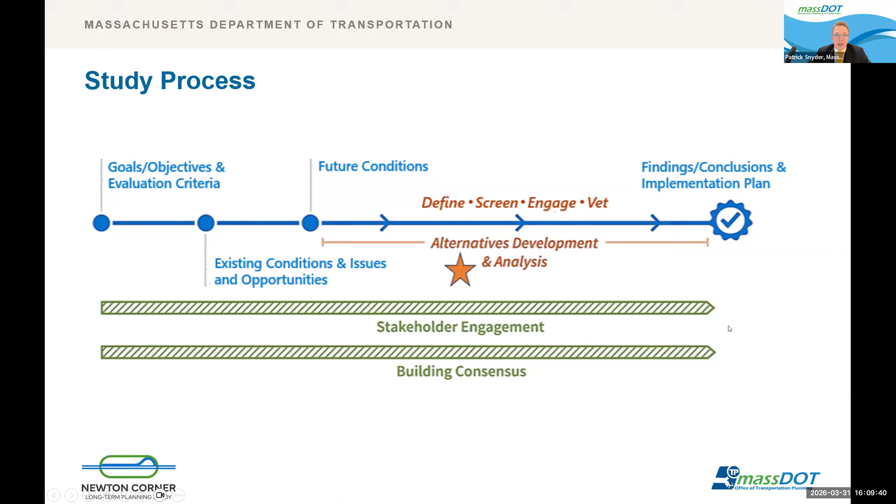At this point, we're going to transition to an overview of our alternatives development process, and I'm passing it to Christine from our consultant team, VHB.

Thank you, Patrick. Hi, everyone. It's nice to see a lot of familiar and friendly faces. I know it's been a while. I'm Christine Trearchis. As Patrick noted, I'm the project manager from VHB for this study. Now, let's take a look at the alternative development process.

You may recall that we came to you last year with some initial ideas that we referred to as alternative components. These components were an initial list of ideas based on previous feedback that we'd received that could then be layered upon each other to develop full concepts. These included the following components on the screen.

So I'll read through them very briefly. Number 1, 2-directional travel within Newton Corner. 2, installing roundabouts. 3, a new bridge connecting Centre Street North to Centre Street South. A relocated I-90 westbound on-ramp. 5A and B are a relocated I-90 eastbound off-ramp and extending the existing I-90 eastbound off-ramp. 6 is closing or repurposing the Washington Street westbound bridge. 7 was a bus transit hub in Newton Corner. 8 was a potential commuter rail station in Newton Corner.

9 was air rights or decking over I-90. Then closing or repurposing the Washington Street eastbound bridge. A pedestrian or bicycle bridge over I-90. A neighborhood greenway on Charlesbank Road. A shared use path on St. James Street. A pedestrian and bicycle bridge connecting directly to the Charles River. Full interstate access at West Newton, and finally new interstate access in Brighton.

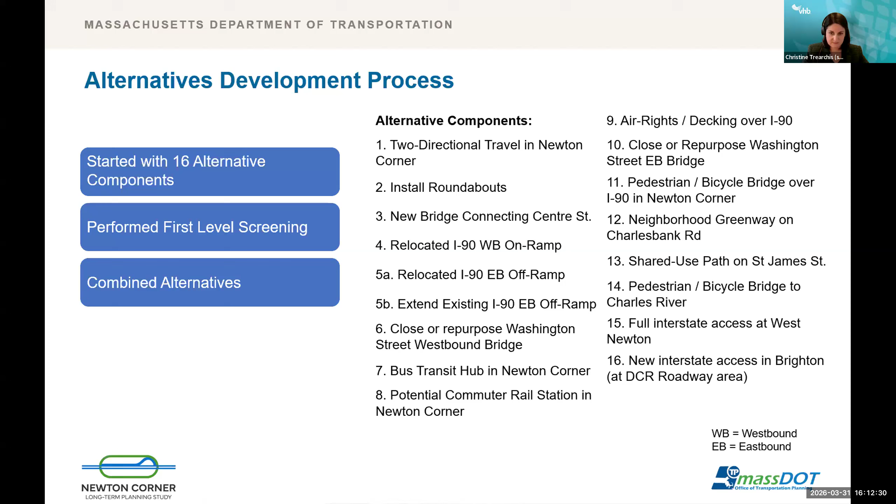Now we're going to review the 6 draft alternative concepts with you to get your feedback before we carry them into the analysis phase.

Before presenting each draft alternative, I want to set the stage that these are concept level alternatives and are preliminary. They are intended to illustrate intent rather than provide a detailed design. Further refinements will continue through alternatives analysis and in coordination with all of you in our working group, the City of Newton, MassDOT, and ongoing public engagement.

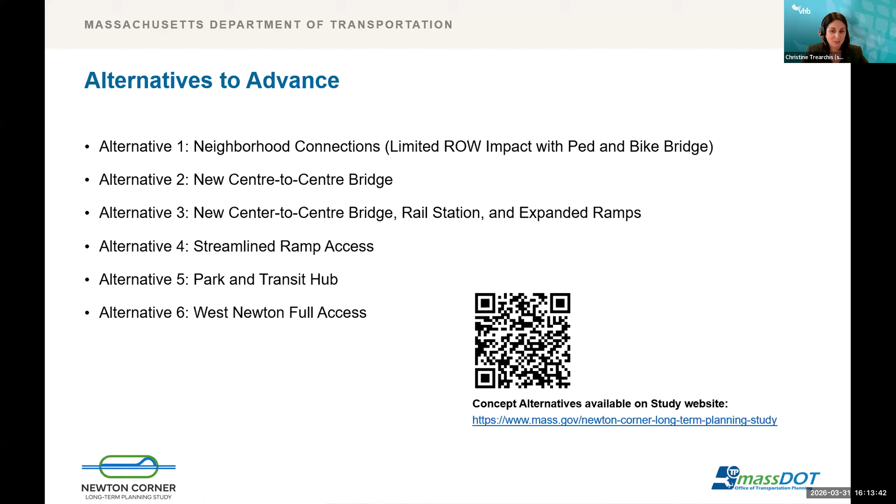Alternative 1, neighborhood connections. This first combined alternative is focused on enhancing neighborhood connections for all users, including the addition of a pedestrian and bicycle bridge across I-90 with limited right-of-way impacts. This alternative will also maintain the existing vehicular bridges on the east and west side of the interchange.

As you follow along, I'm going to highlight a few key features of this alternative. The first is maintaining one-way travel on the western bridge, so it would be in the southbound direction. Next is extending the second lane on I-90 eastbound on the I-90 eastbound off-ramp by about 400 feet.

Then, as I noted, a new pedestrian and bicycle bridge across I-90. Then extending the second lane on the I-90 westbound off-ramp by about 500 feet. I'll note that this is one element that you will see in all of the concepts presented today.

This includes two-way vehicular travel on Washington Street north of I-90, as well as on that east bridge. It includes neighborhood pedestrian and bicycle connections on both Charlesbank Road and St. James Street, connecting to the Charles River via Russell Road.

And finally, a one-way northbound travel on St. James Street to accommodate a shared use path for both pedestrian and bicycle movements.

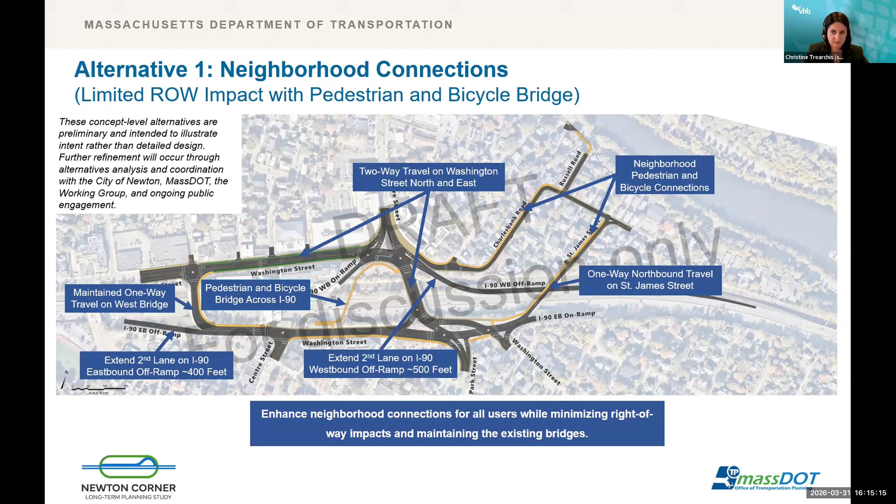Now I'm going to review the vehicular circulation patterns. As shown, this alternative will provide two-way vehicular traffic on Washington Street north of I-90, as well as on the Eastern Bridge. One-way travel will be maintained on Washington Street south of I-90, as well as on the Western Bridge. The intent of this revised circulation pattern is to reduce some driver confusion by providing new and more direct travel paths. Additionally, St. James Street will be converted to one-way travel northbound to accommodate the new shared use path.

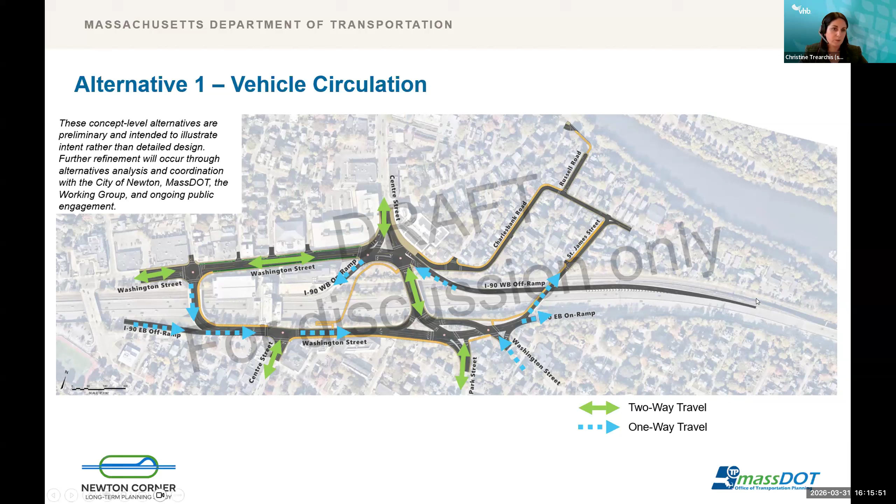With the proposed changes in vehicle circulation, we wanted to show a few key travel path movements. The two that I'm going to walk through are routes that would change from the current operations. For vehicles traveling on Washington Street from the west to I-90 westbound, drivers will now be able to stay on the north side of I-90 and won't need to circulate around the south side of Newton Corner to access the ramp.

Another route that will be more direct is for vehicles traveling from Centre Street north of I-90 from Watertown to Park Street south of I-90. Drivers will now be able to travel southbound on the existing East Bridge, eliminating the need to travel all the way around Newton Corner.

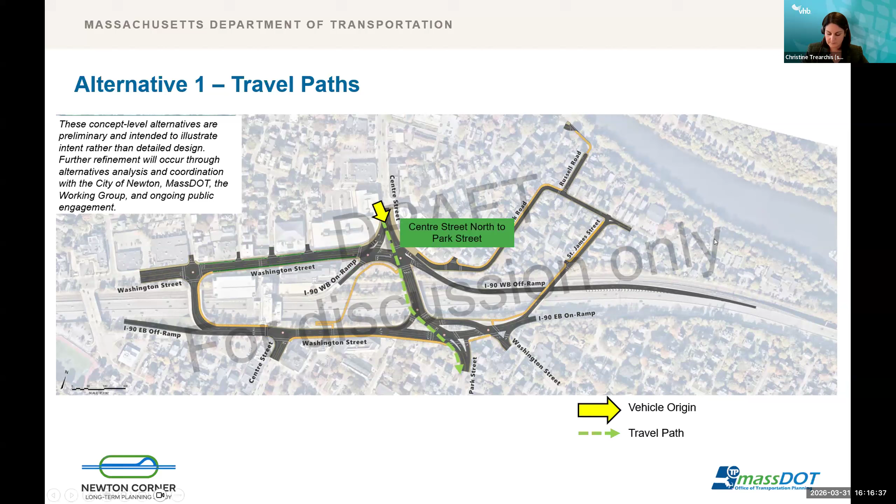Bicycle accommodations will consist of a mix of shared use paths and dedicated bicycle lanes provided on nearly all roadways and through the Newton Corner interchange. A new bicycle and pedestrian bridge is proposed for north-south travel, connecting on either side of I-90. Additionally, new shared use paths are proposed on St. James Street and on Charlesbank Road, connecting to the Charles River via a new connection off of Russell Road.

Sidewalks will be provided along all roadways without shared use paths, and signalized crosswalks will be located in all quadrants of Newton Corner. I will now hand it over to Matt to walk through the second draft alternative.

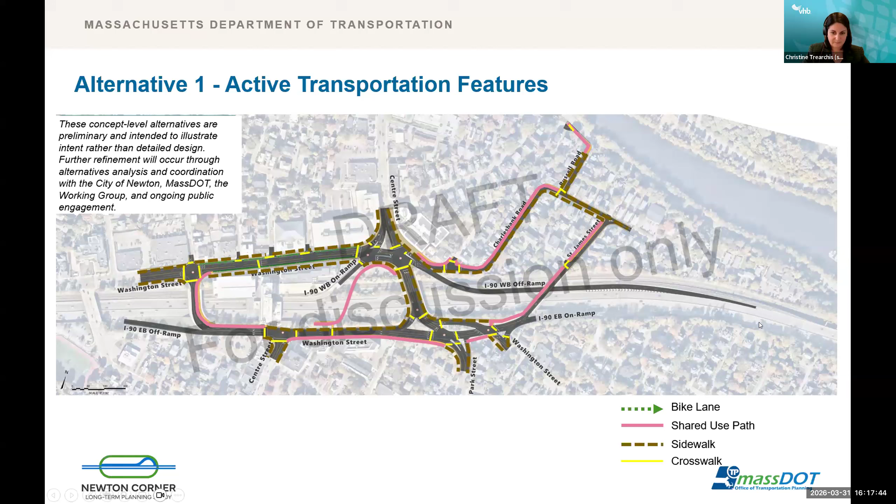The second draft combined alternative will improve north-south connectivity with a new Centre-to-Centre bridge, while also maintaining the existing east-west bridges at Newton Corner and the existing Church Street Bridge. The new center-to-center bridge will connect Centre Street on the north and Centre Street on the south, reestablishing the historic street network through Newton Corner, and it will provide two-way traffic for vehicles, pedestrians, and bicyclists, greatly improving connectivity across Newton Corner.

Now I'm going to talk through a few of the key features in this alternative, similar to how we did in alternative one.

The first element I'm going to talk about is a relocated I-90 westbound on-ramp. For this alternative, we're proposing to relocate that on-ramp from where it's currently located, roughly in the northeast quadrant, to the west of Church Street, west of Newton Corner.

Next element is pedestrian and bicycle accommodation. Pedestrians and bicycles will be accommodated on the existing West Bridge with a new shared use path. Additionally, the West Bridge will accommodate northbound or westbound vehicular traffic. Similar to alternative one, the second lane on the I-90 eastbound off-ramp will be extended by about 400 feet, while that off-ramp will remain in the existing location.

As I mentioned earlier, a key element of this alternative is that new center-to-center bridge, accommodating bidirectional travel for all users and reestablishing the historic street network.

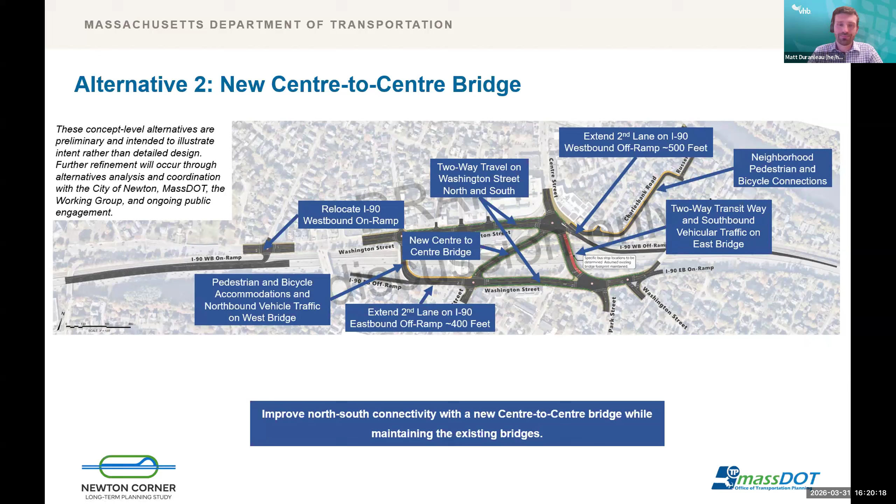Looking at some vehicular circulation patterns, two-way traffic will be provided on Washington Street north and south of I-90 and on the new center-to-center bridge. Additionally, the two existing east and west bridges in Newton Corner will flip direction, with the west bridge carrying westbound

or northbound traffic and the east bridge carrying eastbound or southbound traffic. This will better align the direction of each bridge with the desired travel paths and will work in coordination with the new center-to-center bridge carrying bidirectional traffic.

Looking at some key travel paths for movements that will change: first, the travel path from Park Street from the south for vehicles heading to I-90 westbound at that relocated on-ramp. If you're coming up Park Street, you would now take a left onto Washington Street on the south side of I-90, on the new two-way section. You would then continue across I-90 on the existing West Bridge, where traffic would be reversed, now one way in the westbound, northbound direction. Then you would take a left onto Washington Street, past Church Street, and then take a left onto the new westbound on-ramp located west of Newton Corner.

For drivers traveling from Center Street on the north side, from Watertown, to Center Street south towards Newton Center, you would be able to go straight through on this new bridge through the two new signalized intersections, and you would not need to circulate around Newton Corner as you do today.

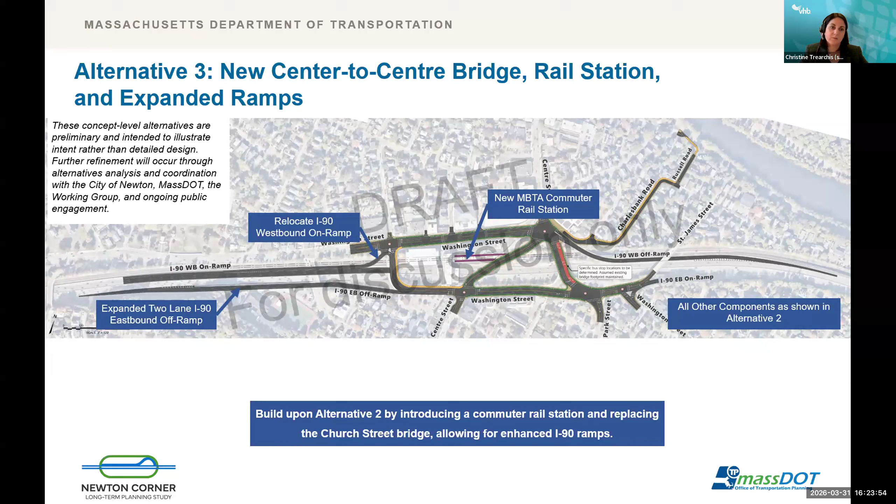Let's look at a couple of travel paths for the movements that will change with this Alternative 3. The first path is from the I-90 eastbound off-ramp. If you're headed towards Center Street to the north, towards Watertown, as shown, you will now get off the ramp, take a left turn onto the new center-to-center bridge that will then allow you to travel northbound.

For vehicles traveling from Center Street North, from Watertown to the I-90 westbound on-ramp, drivers will now take a right onto Washington Street and then make a left turn at the relocated on-ramp that ties in at the intersection with the existing West Bridge.

The active transportation features are the same as what was previously presented in Alternative 2.

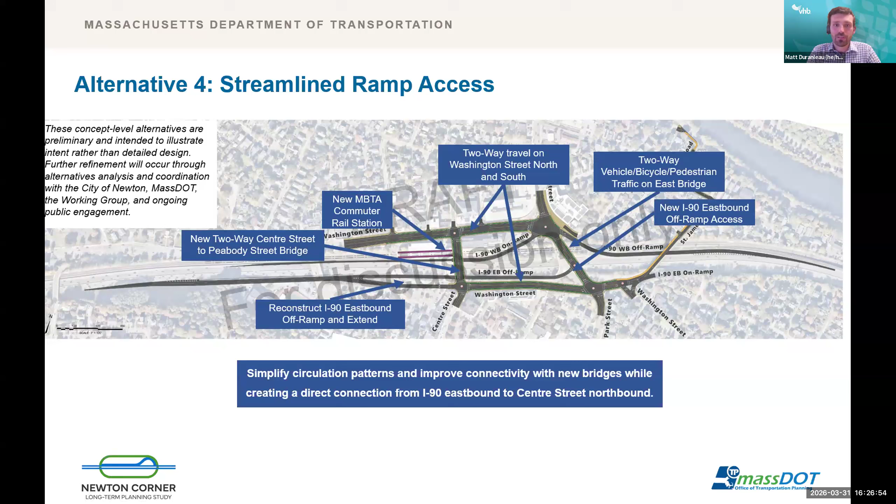The East Bridge would be reconstructed and would include two-way accommodations for vehicles, pedestrians, and bicyclists on the East Bridge. There'd be a new direct connection from I-90 eastbound that would connect to this East Bridge, allowing a more direct connection for vehicles destined to the north on Centre Street towards Galen Street in Watertown, which I'll highlight again in a minute on the travel path slide.

Again, we'll extend that second lane on I-90 westbound to provide additional capacity. And we will include neighborhood pedestrian and bicycle connections connecting to the Charles River.

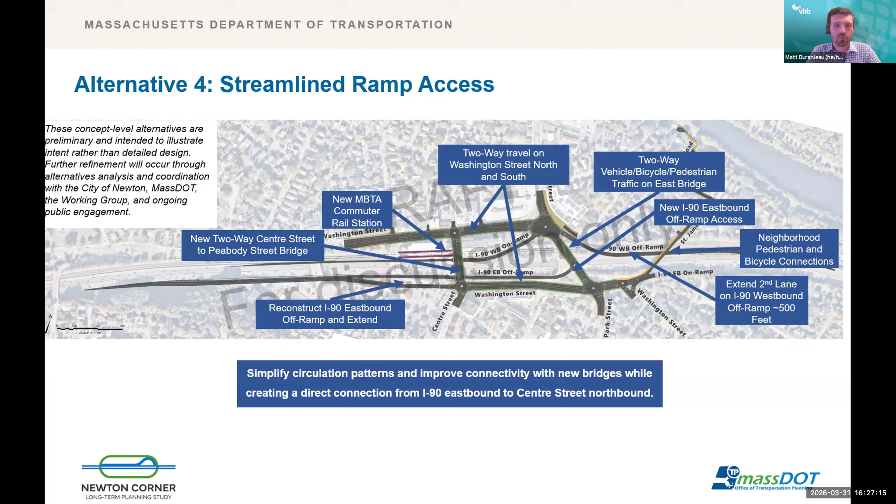Looking at the vehicle circulation patterns here, two-way travel will be provided on Washington Street north and south of I-90 and on both of the two new bridges connecting across I-90. All of the local roads here will have two-way travel, providing enhanced connectivity. St. James Street in this alternative is proposed to have one-way travel heading away from Newton Corner in the eastbound or northbound direction to accommodate that shared use path.

Now looking at a couple of key travel paths, I first want to highlight the I-90 eastbound to Center Street northbound travel path. This would have the greatest change under this alternative. You would depart I-90 onto the off-ramp, which would be extended farther back than today by roughly 1,200 feet. Then once you're on that off-ramp, it would actually split into two separate ramps. Vehicles to the right would be most traffic, similar to today, where it would come up and intersect Center Street and Washington Street and that new Centre to Peabody Bridge in roughly the same location as today.

Drivers destined to Center Street North towards Watertown would actually stay to the left at that split, and there'd be a new ramp that goes underneath the West Bridge and then comes up with a new signalized intersection on the East Bridge, allowing drivers to take a left there. So they would be able to avoid all the local streets on the south side of I-90 and take that left onto the East Bridge and then go north through the Washington Street intersection onto Center Street towards Watertown.

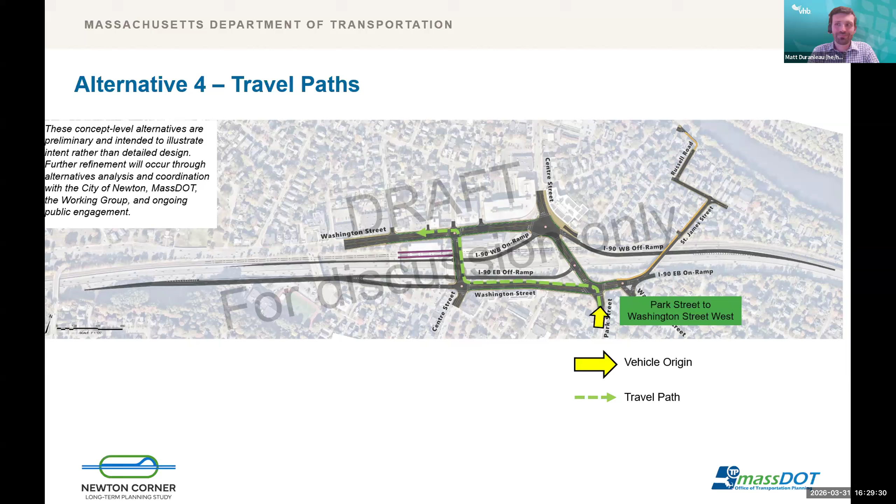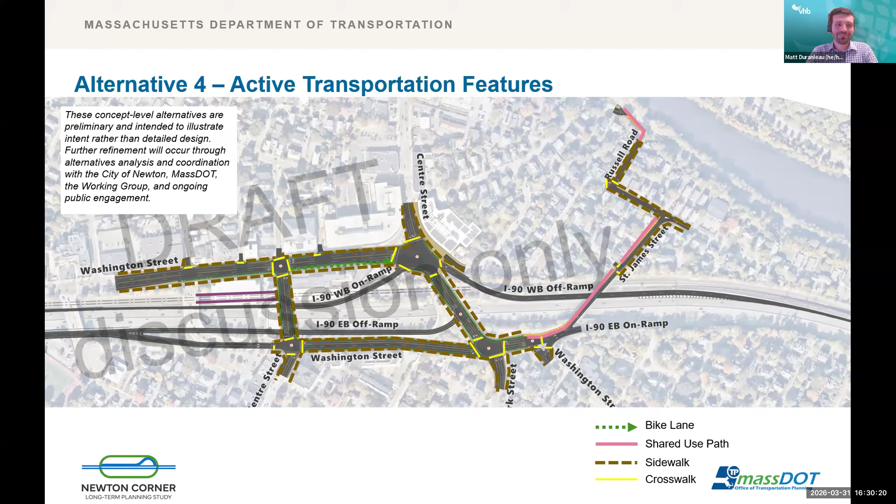Thank you, Matt. Now on to alternative 5, which we are calling the Park and Transit Hub. This combined alternative will utilize decking to create a park and transit hub in the center of Newton Corner while enhancing connectivity for all users. This alternative includes many of the same elements you've seen in the previous alternatives, including a new commuter rail station, the expanded ramps to and from I-90 West, a new Centre-to-Centre bridge, as well as a new element of decking over I-90.

I'll walk through some of the elements here. First is a relocated I-90 westbound on-ramp to be located where the current West Bridge meets Washington Street. There will be a reconstructed I-90 eastbound off-ramp to extend upstream. As I noted, an MBTA commuter rail station, and a new Centre-to-Centre bridge connecting north to south with one-way southbound vehicular travel and two-way transit travel.

Two-way travel will be provided on Washington Street north of I-90. There will be decking over I-90, including a park and pedestrian and bicycle connections, and extending that second lane on the I-90 westbound off-ramp by 500 feet. A reconstructed East Bridge will provide northbound vehicular travel, and finally, new pedestrian and bicycle connections via St. James Street.

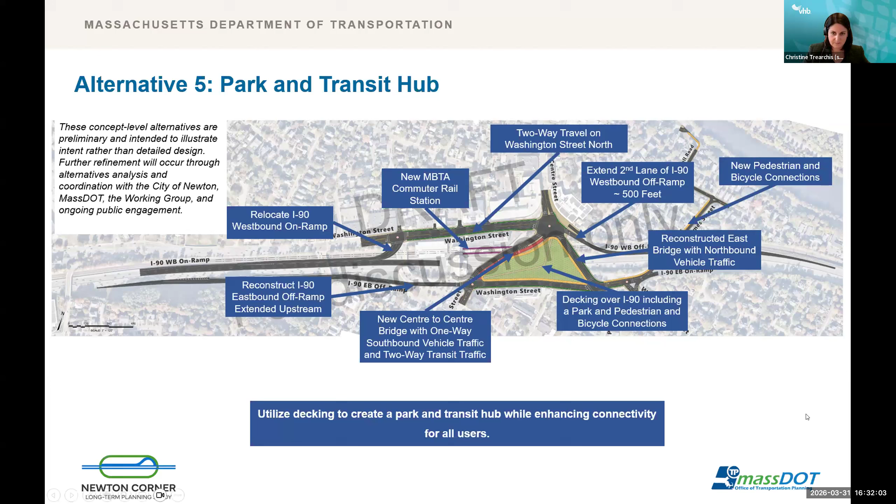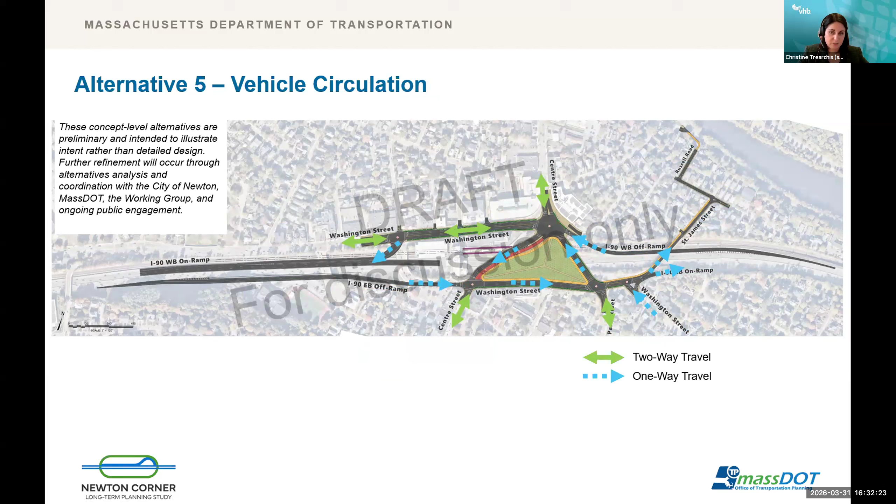Looking at the vehicle circulation patterns, this alternative proposes to have one-way travel on the new bridges surrounding that new decking in a counterclockwise motion. Additionally, Washington Street north of I-90 will now accommodate two-way travel. St. James Street will be converted to one-way travel northbound to accommodate the new shared use path. Looking at a few key travel paths, drivers coming from the I-90 eastbound off-ramp and traveling to Centre Street North will now travel around the south and east sides of that new park and decking area.

For vehicles traveling from Centre Street North to Centre Street South, they will now use the new Centre-to-Centre bridge on the west side of the decking area.

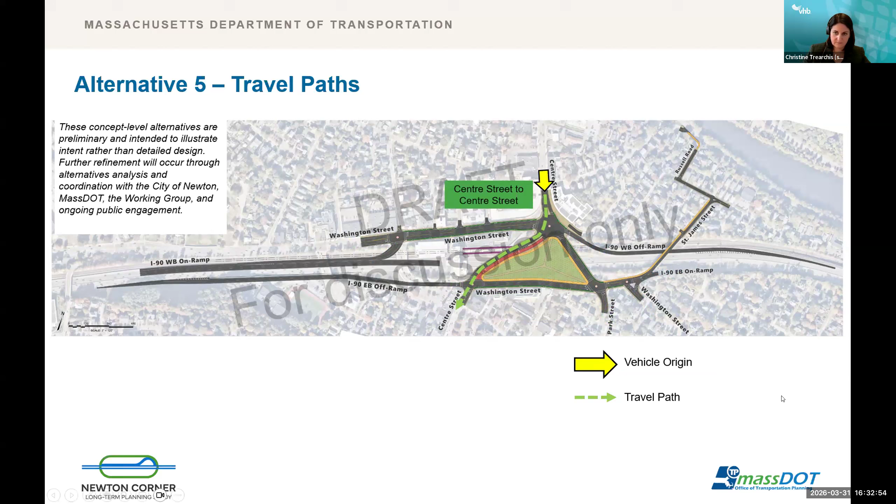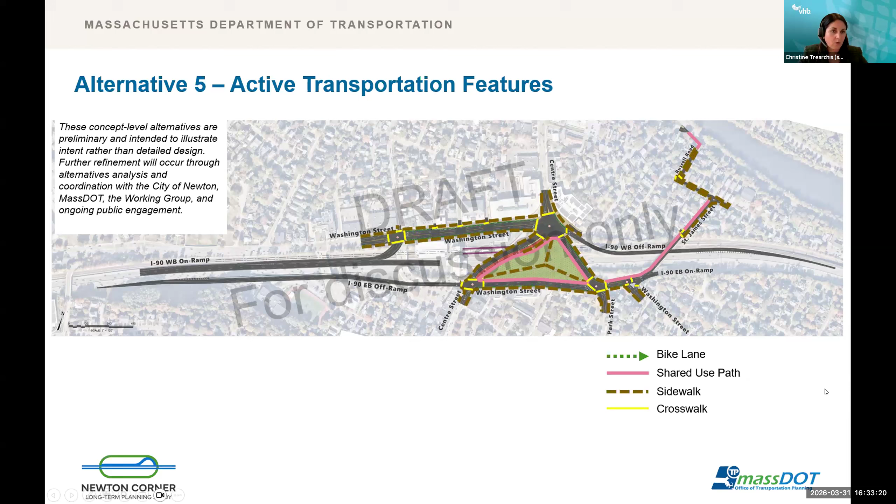Reviewing the active transportation features, similar to Alternative 4, the bicycle accommodations will consist primarily of bidirectional bicycle lanes on local roadways through Newton Corner, with a new shared use path on St. James connecting to the Charles River. Sidewalks will be provided along all roadways without shared use paths, and signalized crosswalks will be located in all quadrants of Newton Corner.

I'll now hand it back over to Patrick to speak to the final draft alternative. Thank you, Christine. So the final draft alternative we have to present and talk through today is Alternative 6, full access at West Newton. This alternative conceptualizes full interstate access with a new I-90 eastbound off-ramp and a new I-90 westbound on-ramp at West Newton.

This alternative would be layered with the proposed improvements at Newton Corner in Alternative 5. The new eastbound off-ramp is proposed to tie into the existing traffic signal of Washington Street at Perkins Street, and the preliminary concept results in the off-ramp traveling behind the existing buildings on Sims Court.

The new I-90 westbound on-ramp would utilize part of the existing off-ramp on the north side, which would be reduced from 2 lanes to 1 lane and would tie into Washington Street at the existing traffic signal with the westbound off-ramp.

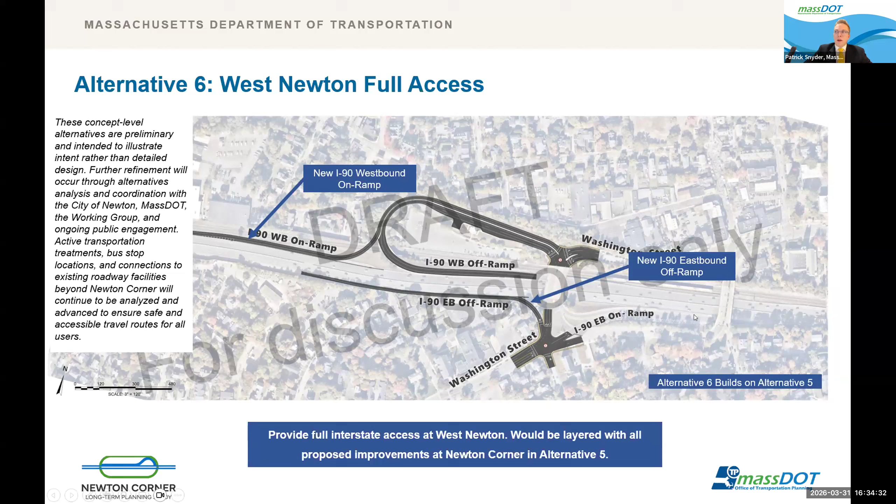Looking at the vehicle circulation patterns in this alternative, the new ramps would provide full circulation to and from I-90 eastbound and westbound, full vehicle access in this area from I-90. No changes are proposed to the local roadways at present, and the changes at West Newton are limited to vehicle connections only, with no currently proposed changes to pedestrian or bicycle infrastructure, although crosswalk and signal upgrades would be made.

When we presented this as a component at the last meetings, we did hear feedback that it's not desirable. As a result, the conceptual eastbound off-ramp has been revised to shift its alignment closer to the Mass Pike. It's important to note that this concept for full access in West Newton predates this study and was proposed during prior studies in this area, as well as MassDOT's road safety audit carried out at the Newton Corner interchange.

As we move into alternatives analysis, part of that next step is in-depth traffic analysis to understand vehicle flow and use of potentially relocated ramps here in West Newton and some of those proposed to be relocated closer to Newton Corner. While it may not move past this study, alternatives analysis provides an opportunity for a more in-depth look at potential demand for these ramps than has previously been evaluated, and will allow a closer understanding of what that might or might not be. We acknowledge community feedback about this alternative and will continue to take it into account as the study progresses.

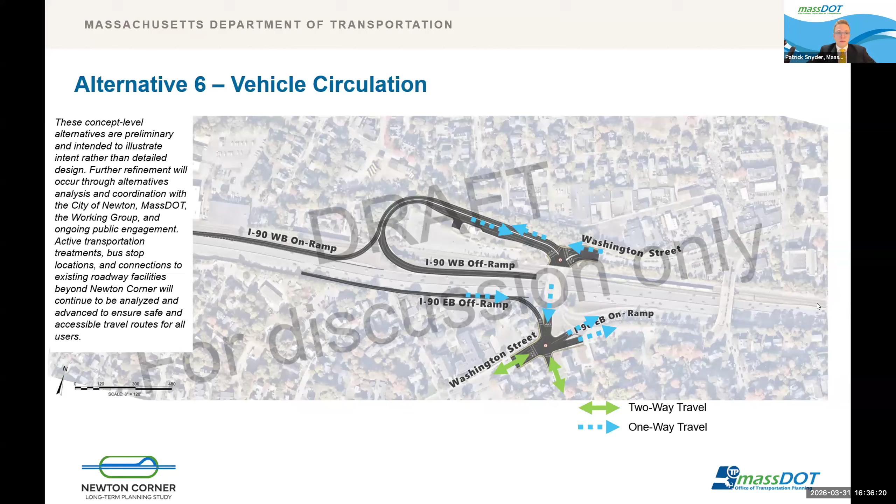Next, we'd like to touch on what our alternatives analysis process will look like. Evaluation criteria are a framework for our alternatives analysis process. They're qualitative and quantitative standards and metrics developed based on the goals and objectives for the study. Part of the overall study process is understanding and reporting what benefits and impacts can reasonably be expected from these alternatives. These metrics will help us compare the alternatives amongst each other, and we will present results from our upcoming analysis with you at a future meeting. The full list of evaluation criteria is available on the study website.

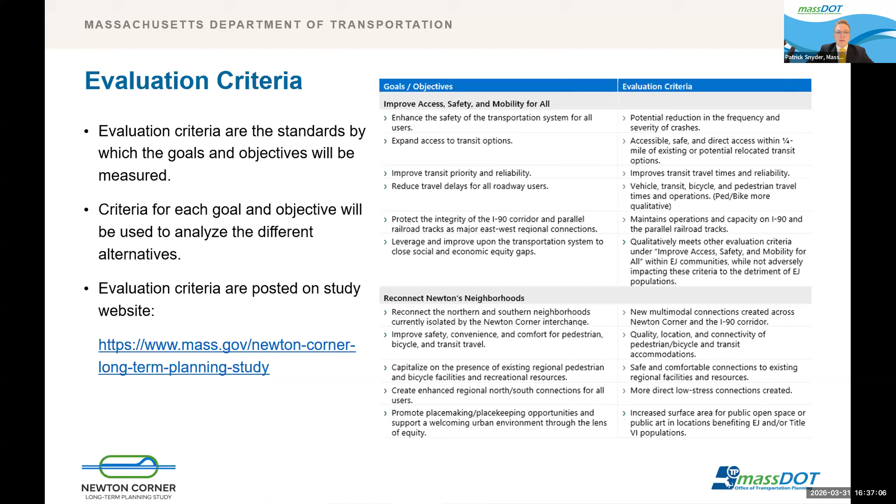Before opening up the floor to feedback, we'd like to give you an update on our overall schedule. There have been some changes to the overall study timeline. We had hoped to complete the study this winter, but alternatives development took longer than expected to ensure due diligence to community feedback. Right now, we're at the end of alternatives development, and following this meeting, we will transition to alternatives analysis.

As we progress, we'll use your feedback to continue refining alternatives and analyze them using the evaluation criteria. This will include quantitative analysis, like anticipated impacts on transportation conditions and environmental data, as well as qualitatively looking at how the alternatives align with study goals. We hope to reconvene in several months, potentially over the summer, and currently aim to have a draft report ready in the fall, which would then be released for a public comment period, with the study wrapping up late this year or over the winter.

At this point, we're going to transition to a discussion among working group members. As we start our conversation, I'd like to emphasize that your feedback is critical in this process. In part, this study came about due to your advocacy for changes at Newton Corner.

This is a long-term planning study, and with us discussing transformational changes, we have to strike a balance between everyone's interests. Our conversations today, at past meetings, and at future meetings aim to shape a future vision for Newton Corner that takes community voices into account.